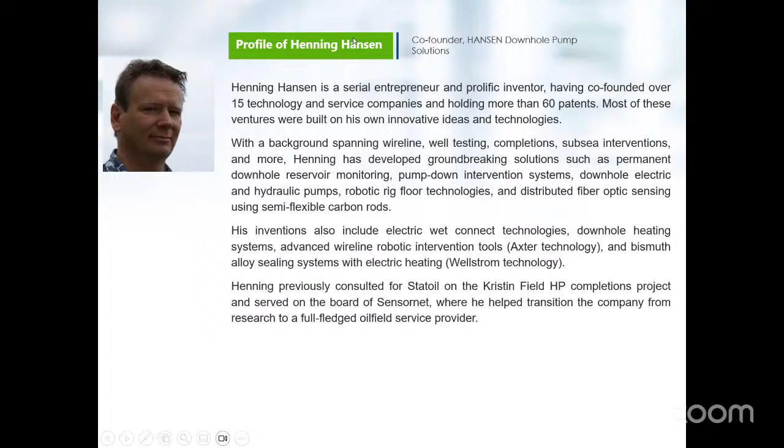Ladies and gentlemen, he will be taking us on innovations in oil field technology, the downhole electric wet connect, and a career of inventive solutions. Please help me welcome the co-founder of Hansen Downhole Pump Solutions, Henning Hansen. The stage is yours for the next 30 minutes.

Thank you. I hope you can hear me now, and I will try to share my presentation here so we can get that started. One second there.

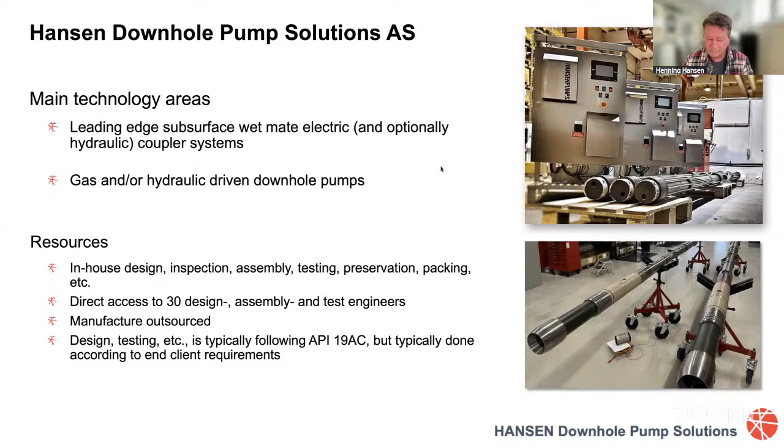Good evening, ladies and gentlemen from SPE Abuja branch, where the existing protocols are duly observed. My name is Nicholas Tuedo of Nequips International. We're based in Port Harcourt. We're into oil and gas services, equipment rentals, downhole tools, maintenance, etc.

Our partner, Hansen, based in Norway, is a specialist in downhole tools with over 30 to 40 years hands-on experience in oil and gas, with several patents to his credit. Recently we got approval from NUPRC for the deployment of the Wet Connect Hansen Coupler technology in the Nigerian oil and gas field. I want to encourage us to pay attention, because as we say, when you're looking for the eye of a fish, you go to the head, and Hansen is one of the best in enhanced downhole tools. We will learn a lot from him.

Thank you, Hansen, you have the floor. There you go, thank you very much Nicholas. As Nicholas said, we have known each other for many, many years, and we're still young. Yeah, so that's good.

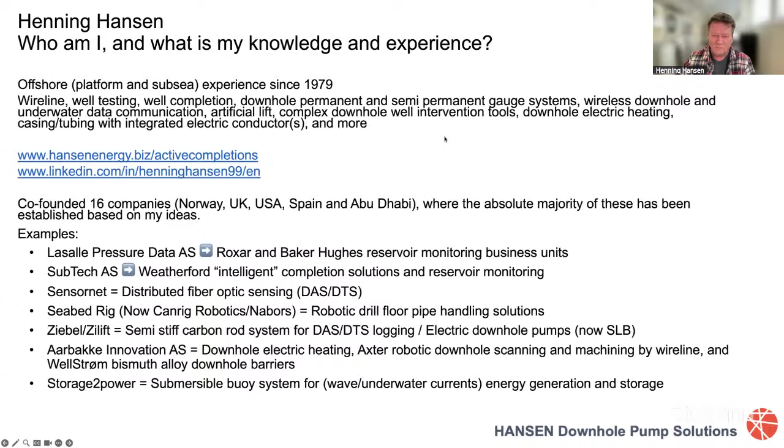But the whole purpose of this connector - I have some slides I'm going to show you after this - is really to get sensors into the reservoir in deep wells or long wells. It's sometimes difficult to run the well completion all the way to the end of the well, to the toe of the well. So then you have to run it in 2 or maybe 3 stages.

You run in the first one, then you have the connector between the first one and the second one, and then you can get the power and data that you need. And as you know, the more sensors you have in a reservoir section down here in the sand face, the better information you can give to the geologists and also the production engineers, and not least the reservoir engineers. They use that data to monitor what's going on in the well, how the well injection is working, and water flooding.

And you produce more every day because you can draw down the pressure closer towards the bubble point, or the gas breakout, and you can also produce more from the reservoir. My experience with having sensors in well bores is that for subsea wells, typically you produce 10-15% more per day using sensors there, because you can balance the production much more.

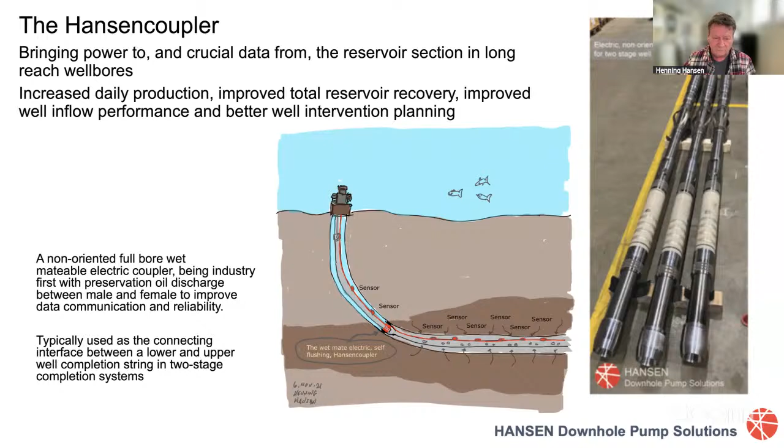So let me see there. Okay, so here I made some sketches to try to illustrate what this is all about, why we developed this electrical connector. For instance, sometimes you have very long horizontal well bores and so on.

And then when you try to run in with the well completion, which is the orange part there, you get to a certain stage but cannot really get all the way to the end of the well bore. So what you need to do is install a lower completion first. That completion will have sensors on it, but we can also have electric valves and other things on it, so you can control and adjust flow or injection on that one. So that's what they call intelligent completions.

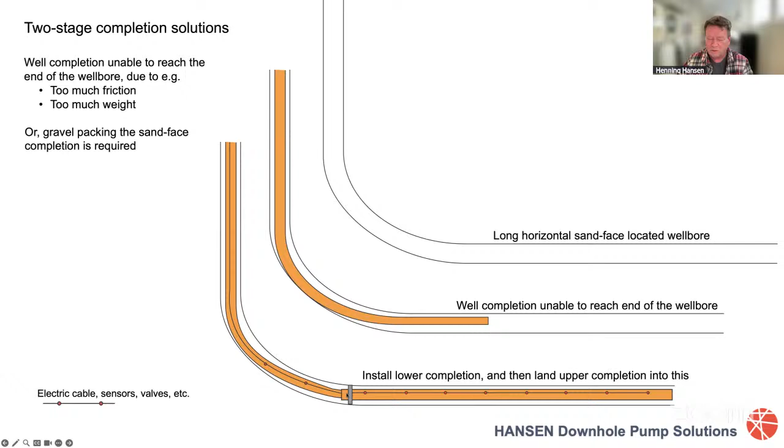And then between the first completion and coming in with the second completion, you need to have an electrical connection here and so on - that is what this is about. You come in with the upper string, which goes up to the wellhead, and you have a cable on it, and you have some sensors if you need that. But then the connector contains the bridge between the upper and lower completion.

So some of the wells we're doing right now actually run 2-stage completions because they are doing gravel pack. They run in with the screens and packers and everything, and have a wash pipe in it, and pump gravel on the outside of the screen. After they've done that, they pull out the running string, the wash pipe and so on, and then come in with the upper completion and connect in here.

And of course, the challenge there is really that gravel packing typically leaves quite a bit of sand and debris in the wellbore. So wellbore cleaning is extremely important in those wells, and we learned that the hard way, that it really needs to be clean.

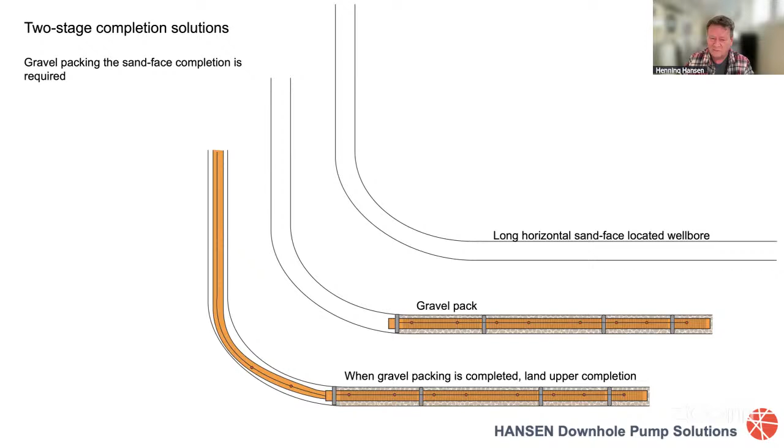So hopefully you can understand that this connector's main use today is actually providing electrical power and signal for equipment further out in the wellbore. Of course, the connector can also implement hydraulic connections if you want hydraulic valves down there, or if you want to do chemical injection or something like that, we can implement that in the connector as well.

So typically what many people forget about electrical wet mate couplers is that if you have trapped seawater, brine, or something in the area where you have the electrical contacts, just imagine if you have a male and a female connector, and if they are connected in that fluid, it's just a matter of time before they will fail. So removing that is extremely critical.

And you typically see the same thing with companies making underwater connectors - they always have some silicone oil or something like that where you connect in. That is much more difficult to do in a wellbore, so that's why we came up with a solution that does that. So if you see somebody has an electrical connector and they do not remove the wellbore fluids, they just isolate it, I am really skeptical about the reliability of that equipment.

So this is quite an old patent now, actually. It was filed in 2011, and I filed it based on how could we replace electrical pumps using wireline. Then we need to have an electric connector. That's how it started, but it also describes how you can use it for the application I'm explaining to you right now.

It also explains that this oil discharge in it is used to wash out or replace the wellbore fluids and so on. But I think the most important thing is that we have built quite a few of these now, done a lot of testing and learning, and there are more patents being produced.

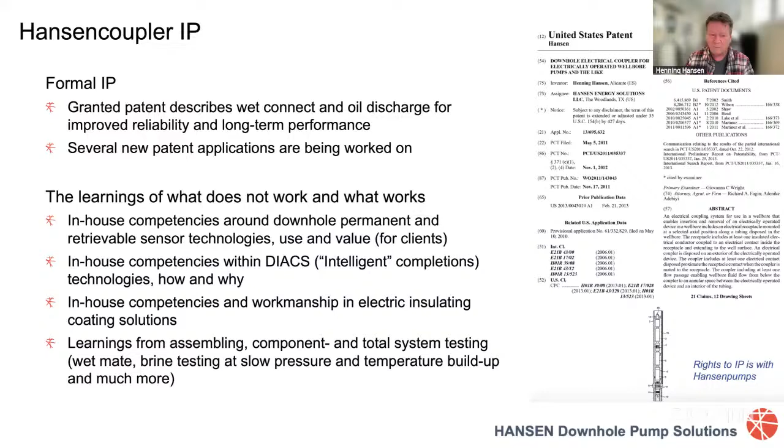I think the learning from that is really what got us where we are right now. So I designed the first electrical wet connector for subsea tubing hangers in 1987. That was the first electrical coupler for subsea tubing hangers and wet trees.

We installed probably 24, I believe it could be 50. I'm not sure because the company was sold later and other people took over. I've also used it in seabed data logging systems.

To the right there you see some photos, that's hydroacoustic data loggers we used on downhole sensors. We installed, and we may still have the world record, 132 sensors in one subsea well, plugged it all off and had acoustic communication from the seabed to the surface. We were the first one to do that, using the same connectors, modified from the downhole use.

I also designed a wet connect for side pocket mandrels. Just like you have side pocket mandrels for gas lift, we developed one with electrical pressure and temperature sensors in them, and we had those sensors wired and replaceable. That's why we needed an electrical connector in there. We learned a lot about downhole connecting from that.

The one we have now, we spent more than 3 years developing and testing it. To be honest, we had some serious failures, and that's what you learn from. You just have to be stubborn and very patient, which I am sometimes. And you have to have a good sense of humor, that's a good spirit for the team working on that.

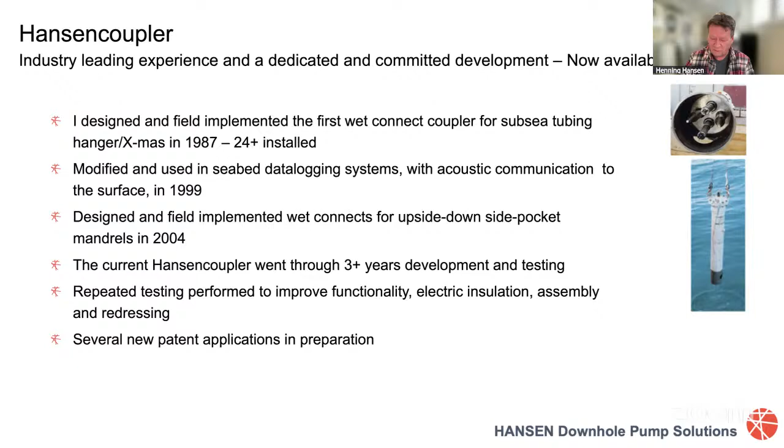And we got it working. We did a lot of repeated testing to make sure everything worked, and we believe today we have a very good product.

Here you see some of the testing. We did oil discharge, a lot of stabbings, pressure testing and temperature testing, electrical insulation and conductivity, shear pin testing, and so on.

Here on the picture, down to the left, you see one of the connectors being tested. This is mechanical testing we did, because the shiny object on the right is the female connector. Above there is a packer, and here you see the upper connector coming in from the upper completion with electrical contacts on them.

Then you have some latching mechanism. We had to test this a lot, because that's what's used when you space out the tubing hanger. First you land the string and say, okay, I have the depth. Then you pull it up again, install the tubing hanger, and do the final landing. To do that space out, you need to know when shear pins shear and when you land, so complex testing had to be done.

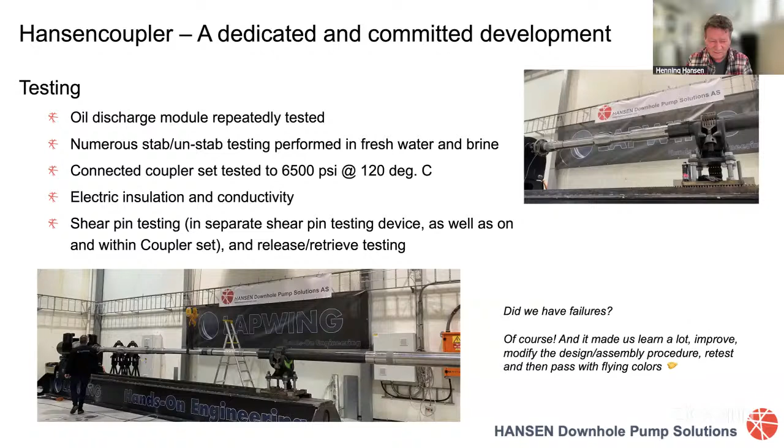And as I said, did we have failures? Of course we did. Then repeated testing and repeated changes, and we got it working. Now we have a product that has no doubt passed with flying colors.

The versions we have are, one for 5.5-inch tubing, installed in 9-5/8-inch casing, that's for one electrical conductor coming from the surface or wellhead down to the sensor. It's a single stab, a single discharge. When you land it, it discharges all the oil, and then it's finally mated.

We have another version, a smaller one, 3.5-inch, for 7-inch liner. That's a little more complex because it has 2 electrical cables, but we can go up to many more electrical conductors if we need to. We have the design for that one, including the hydraulics.

We completed the testing in 2024 on that one, and the testing was very comprehensive. On the drawing at the bottom, you see the female unit, connected to the string below. Up here you see some ratchet mechanism, that's how we can latch in a running tool and rotate the lower string if needed. And here you see the upper connector, there's a stinger that lands in and latches, with a latching mechanism.

Then you latch in, and you can pull out again and do the space out of the tubing. And then you have electrical contacts around that one for the cables. And these contacts and so on are very rugged.

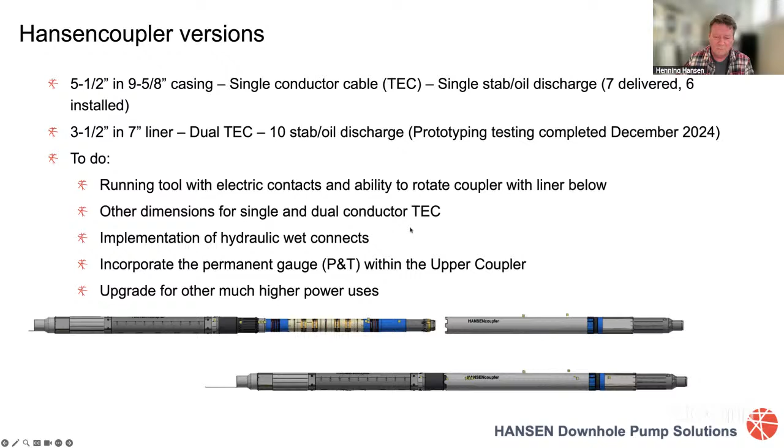So the first one we did, actually we've installed 6 of them, and they're all in deep water wells. We had one failure, and that was a mechanical failure, because as I told you, it's doing gravel pack, so there's a lot of debris there.

We had problems cleaning out the well, so we had mechanical damage when landing it, which is something we learned, and now they have much better cleanup operations in the wellbore there. So that's good. There's going to be quite a few more of those installed.

On the photo, you can see that version there. There's a stinger here that lands into the lower connector, the female. When it lands, this stinger is pushed in, and that displaces oil in this section here between all the seals, and this is where the electrical connector is.

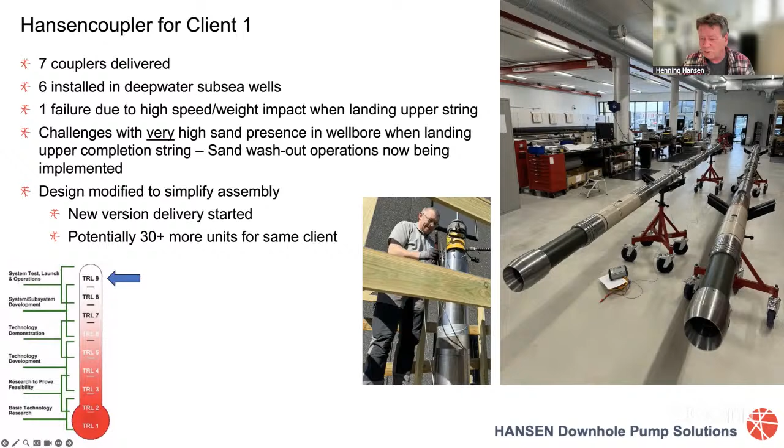So the oil will be displaced between here and the female connector. All up here is just a centralizer to make sure that we don't damage it going in the wellbore, and all the latching equipment is onto it.

The other one we designed for one of the large intelligent completion companies. We completed that one, and that can do a lot more connections. We have the displacement of oil.

We can do 10 times on that one. So that makes it a product which is easier to do when you have problems, for instance, spacing out the tubing hanger and so on.

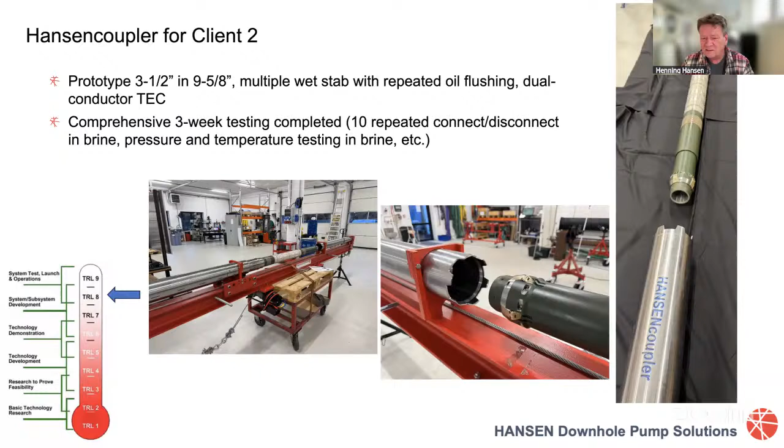So here you see it's on a test bench. We did a lot of repeated stab-ins and testing on the test bench to see that everything works, and measure the oil discharge from it and so on. I think next page here shows some of the testing we did, and it's a pretty good explanation of how the tool works and looks like.

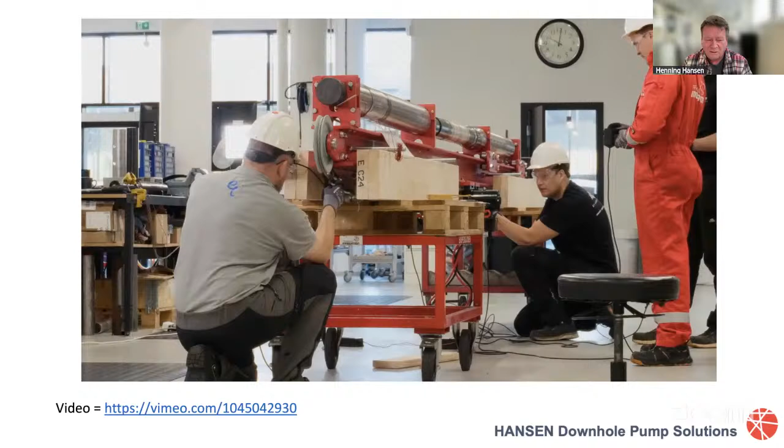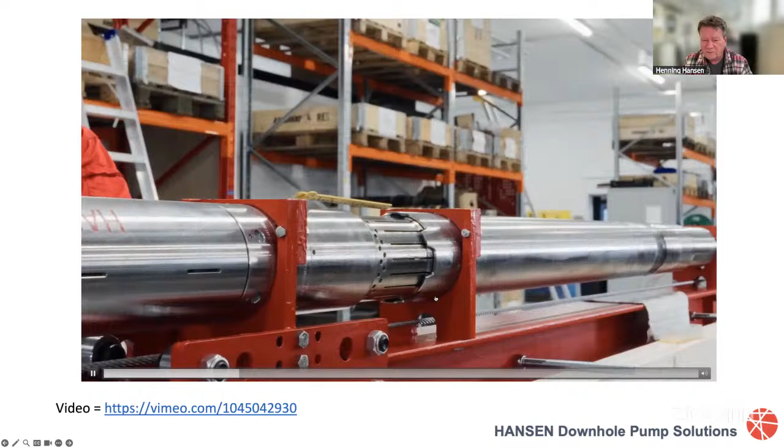So here you see the electrical connectors and the people who are testing them. Here you can see we're entering the female with the male connector and doing all the measurements we need to do there.

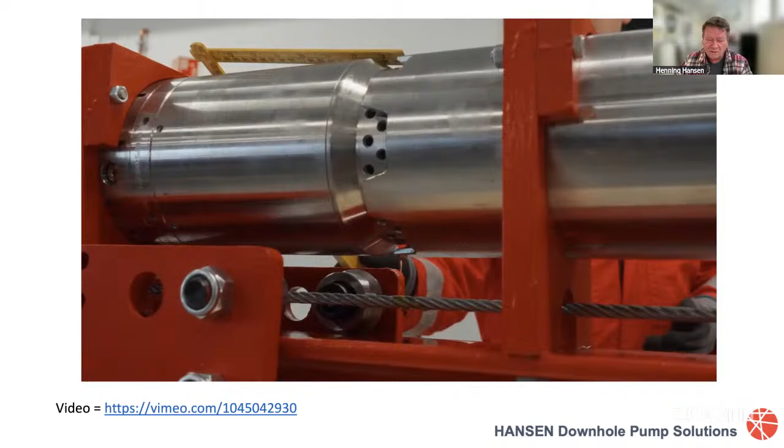So we did repeat the testing, a lot of testing on that one to make sure that everything works. Here you see seals, and you can see it's all connected. And here you can see oil coming out, some of the oil dripping out there.

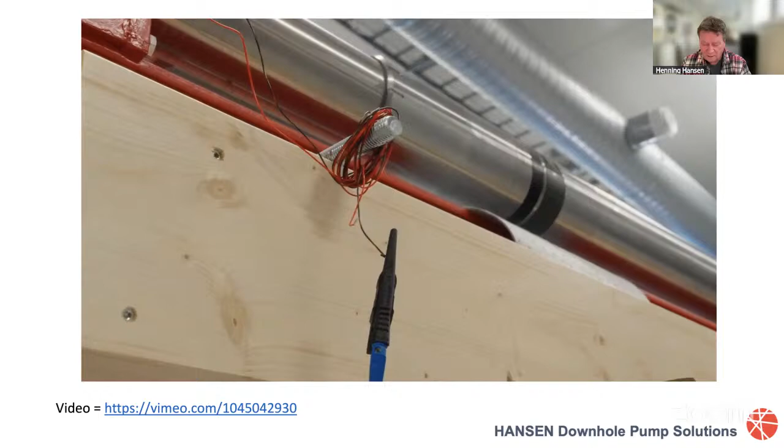So there's two locations oil comes out, but you still have an overpressure on the oil in the connector. So it's a very good testing. It showed that all the oil volume we needed is what's discharged, and it works.

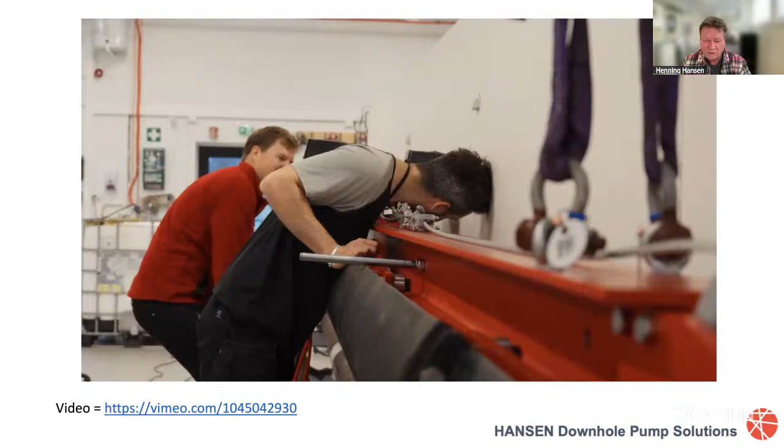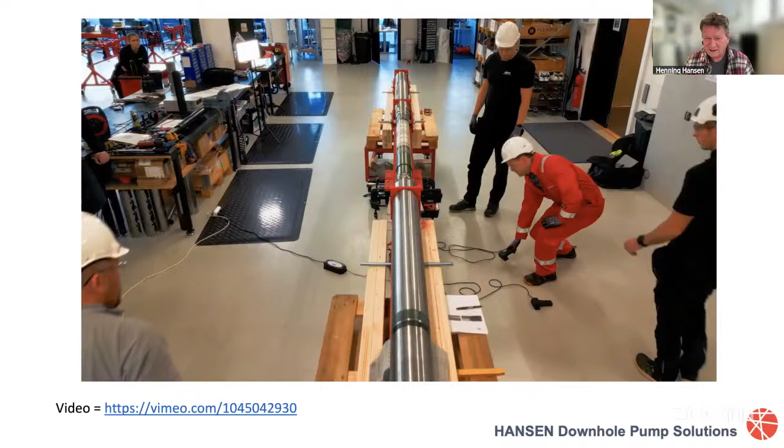So here you see these are the people designing it, that you see on the video here. I believe the people designing it should not just sit at computers designing. They also need to go down and participate in assembling and testing. My experience also, they love that. They have a much better feeling about what they've designed and can also follow up on that one.

I'm not sure how much time we have, but I can quickly go through these, because there are always some safety issues when you handle this equipment, mainly because it's heavy equipment. For instance, these components are 400 to 700 kilos, so lifting and so on, it's important to have proper safety around that.

Pressure testing also, I've seen some bad accidents many years ago with pressure testing. So it's important that you use certified equipment and that everybody knows what they're doing. It's also important that people know the dangers of pressure testing, because 5,000 psi or 10,000 psi is a lot of energy.

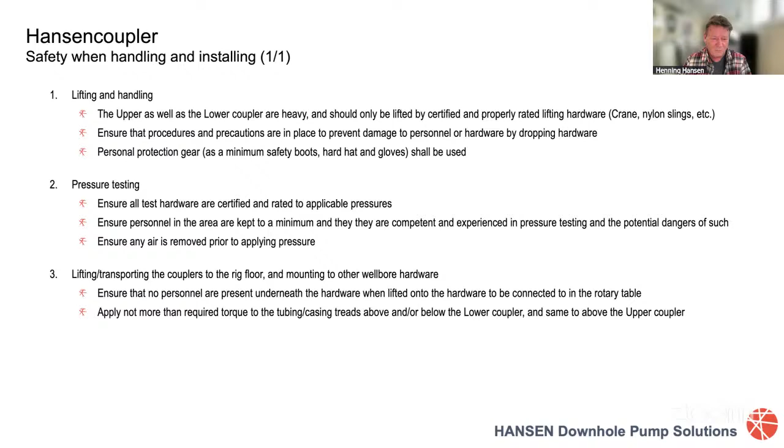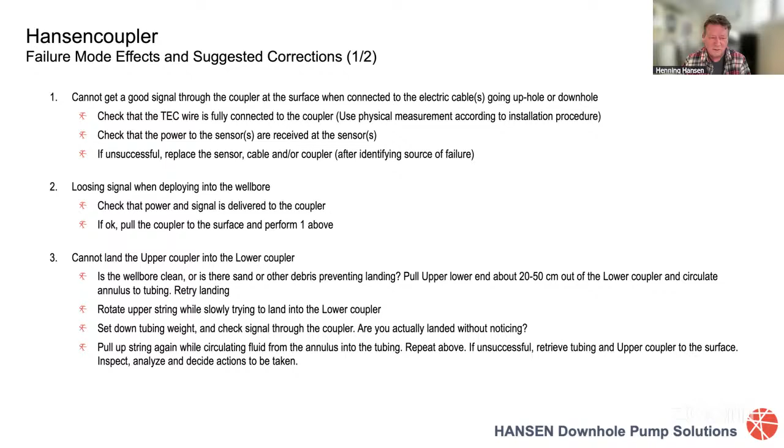So we have procedures for that, also for the lifting from the rig floor and so on, and all this is shared with the people there. We also have, for instance, what if you don't get a signal? What should you do then before you panic? Typically that's at surface, a loose connection at surface on the reel from the cable. You quickly find out with these procedures, but there are procedures for how to manage that.

So a lot of this will be shared with you. Now these are some new ideas I'm going to show you that we're working on.

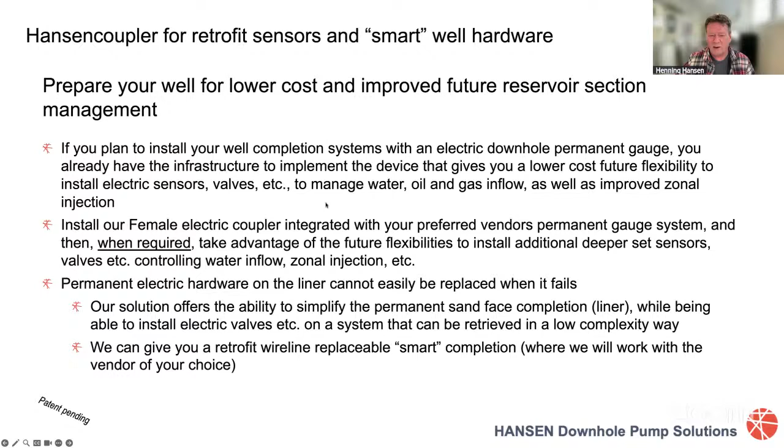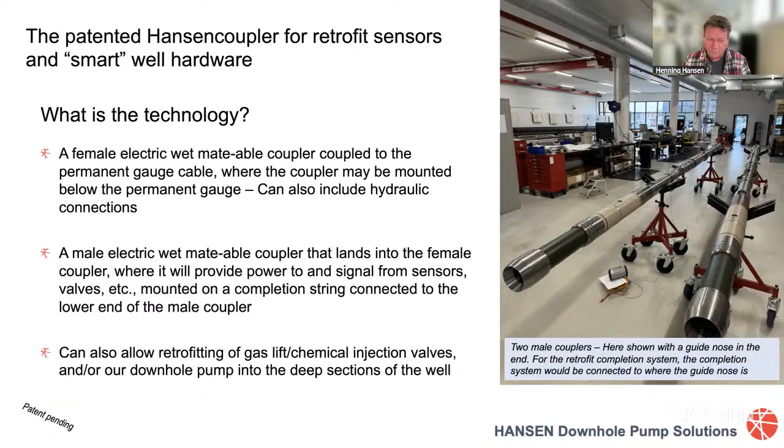Can you prepare a wellbore for future, more complex use? Because quite often you install a well completion, and then after 5 or 7 years, or maybe shorter, you see that you should have had more sensors, or more valves to control the wellbore, the inflow or the injection. So based on this technology, if it's an electrical or hydraulic connection in the wellbore, with creativity you can think of many uses for this. I'm going to show you a bit of that.

Here's one example: you have a well completion with sensors downhole, and you install a female connector in here. This connector has a protection sleeve in it, so it doesn't do anything as long as you don't need it. But then, if you need to do something, you can pull out that protection sleeve, and you have an electrical contact available for installing something in the wellbore.

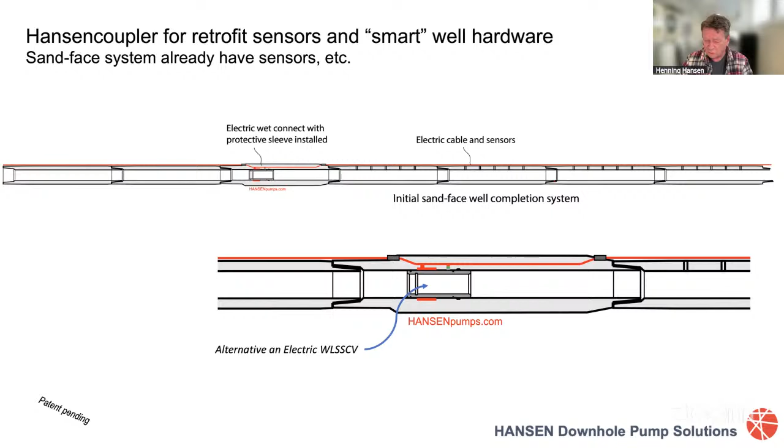So here, the same sketch up here, we've removed this protection sleeve and installed an electrical connector, and we have a completion system installed in the wellbore. That could be, for instance, that you need to block off some inflow or injection areas, or you want more sensors in the wellbore. That's fully possible with this.

Also, what we implement in this is that if you have a failure on the cable or the sensors further downhole, we can isolate that. We can disconnect this cable and route the signal into the cable going into the insert string. So suddenly you get your sensors back - new sensors, but you get all the monitoring back, and you can do what you need to do there.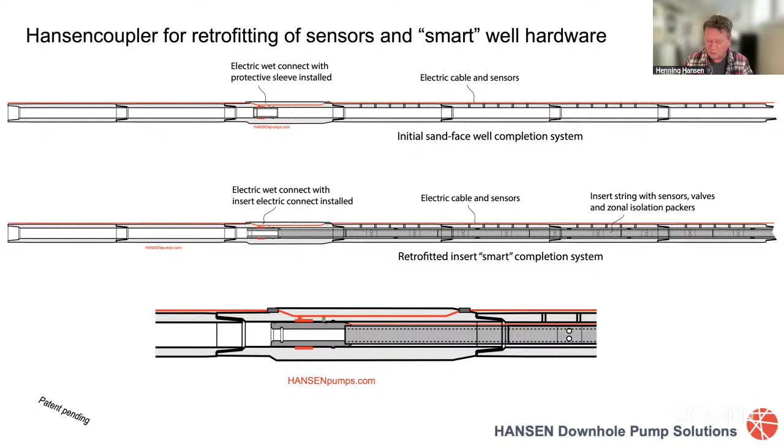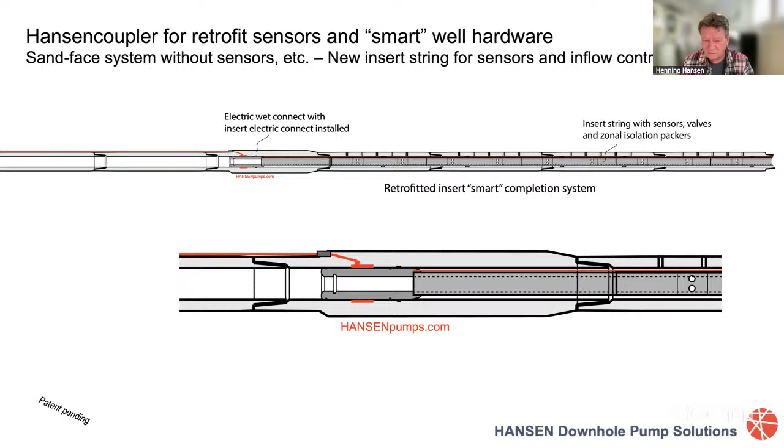So here you see it's more or less the same thing. You can also have a system where you don't have sensors initially, but you have an electrical connector in here, and you may have sensors further up. Then later, after some years, or maybe 6 months, you find out you need to run some sensors in because you really need to understand what's happening in your wellbore. Then we run in with this string with all the sensors, and you maintain the injection or production while getting the data or control you need.

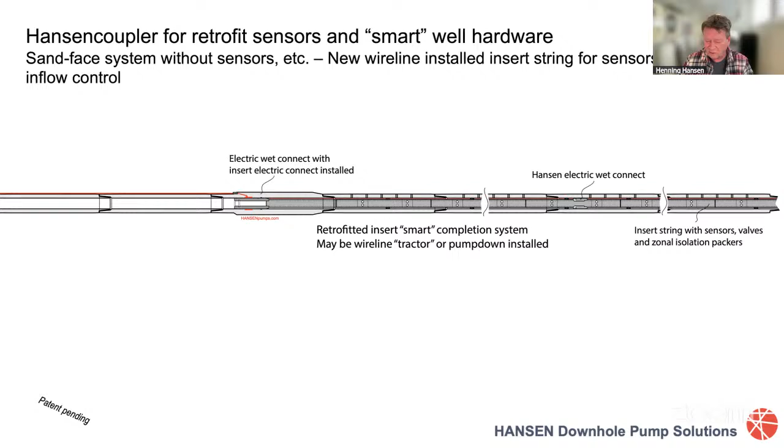What I also believe is possible, many times offshore or subsea, doing a recompletion or running a long string can be a challenge, very costly, and you may not have a stiff riser long enough. So I'm working on how we can install those with wireline instead. Can we install an intelligent completion with wireline? Here you see how that can be done.

You have shorter assemblies, which is the length of the lubricating system you have, including whatever riser you have and so on. And you have electrical connections between each assembly. So then you run in one by one until you land in the old connector in the tubing string and so on. So certainly you can have an intelligent completion retrofitted by wireline later on.

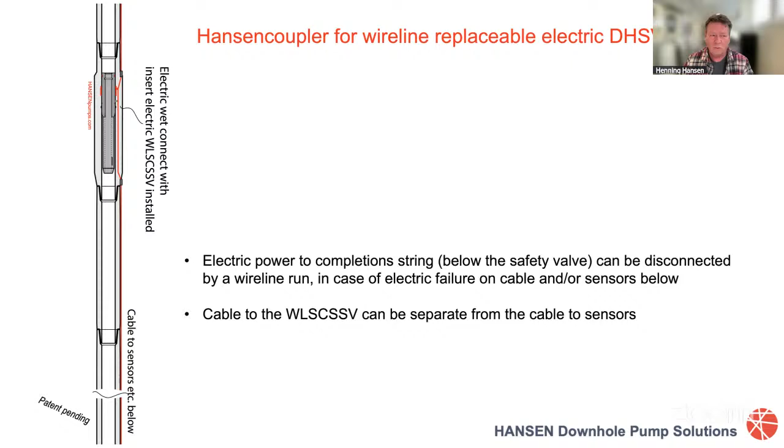Here's another one I'm also doing, and that is electrical safety valves are coming out. There's also some already on the market, but there's more coming out. This can be used for providing electrical signal to a wireline electrical safety valve. It could be on the same cable as the sensors, or it could be a separate cable. And we can also have this disconnect function for sensors or whatever below there if you want to just have priority on the safety valve.

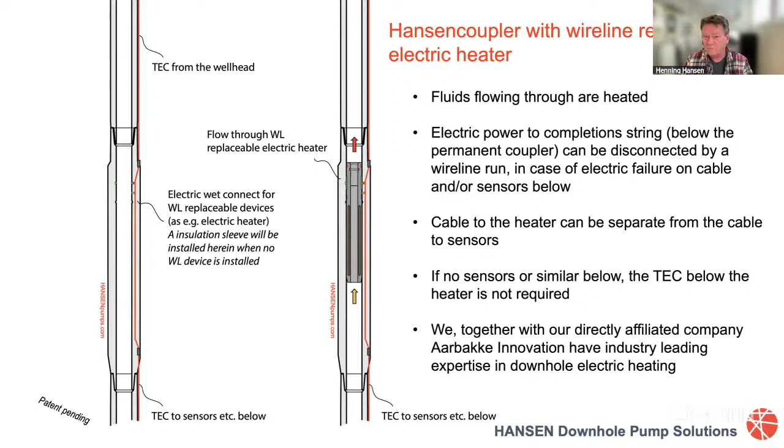But also, as I said, I'm involved in electric heating systems and so on. That will require much more power than we can do now, but that is what we're working on right now. You can have an electrical connector in here, and you can land an electrical heater in there, which heats the production flow, avoiding paraffin or things like that. Sometimes you can also see the wells flow much better if you heat the fluids and so on.

And here's the latest one. I'm sorry about the sketch, but it's actually how I normally start. I start with hand sketches to explain what it is, but this is how we can use this for electrical pump and so on.

My idea there, the plan was actually, we will have a standard ESP system, the motor and everything. And then we have a no-go or latching mechanism implemented. Here you have a traveling piston, with the upper part will land under that one. It displaces oil in this action when we land it. Here we have the electrical connections and seals and so on, and then we have the pump intake, and then standard pump above here and standard ESP below there.

So it's not really rocket science. It's just a matter of a solution where we can do anybody's electrical pump. If it's electrical, we can implement this one. Where they normally connect their cable, we can connect our system.

So the way it would be in the wellbore, we would have this sub here, which has the electrical female connector in it. There's bypass tubes here, where all the flow is going past the motor. You have all the cooling you need. It comes up here, passes the electric connector, and goes into the intake for the pump. And then it's brought to the surface.

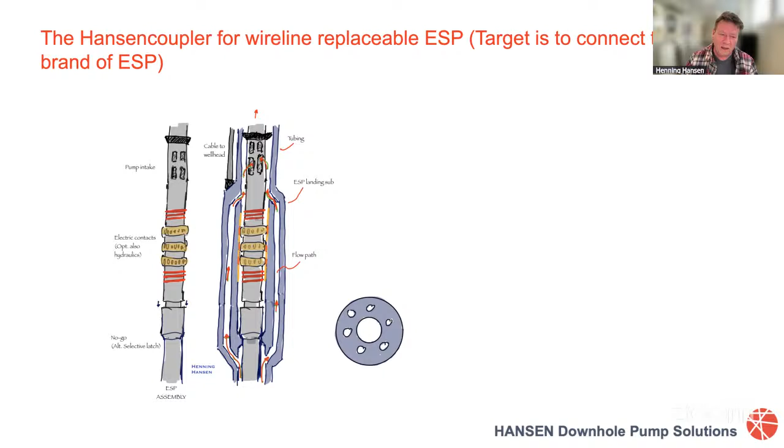So here you can install a pump by wireline, and you can retrieve it when it fails, because typical pumps do fail after some time. And you may have several of these to get more production and so on.

You can also say, well, I'm going to have a tubing deployed ESP, but I'm going to have a coupler, electrical coupler up here. Because if the tubing deployed ESP fails, it's too expensive to replace the well completions. So I'm just going to run in with a wire and deploy the ESP. And that is possible. We can do that with this technology.

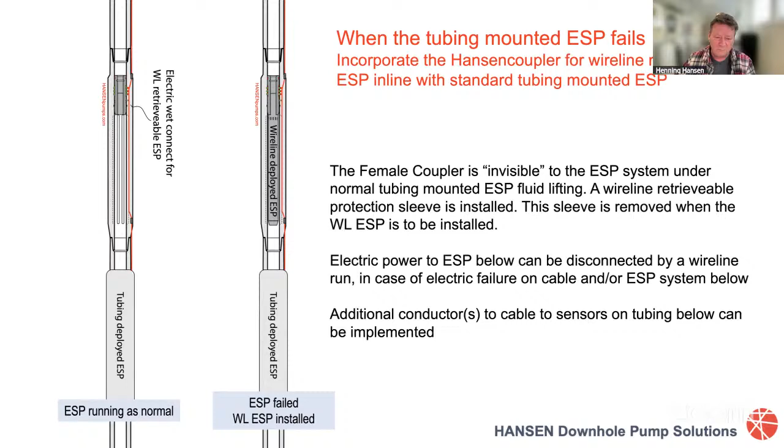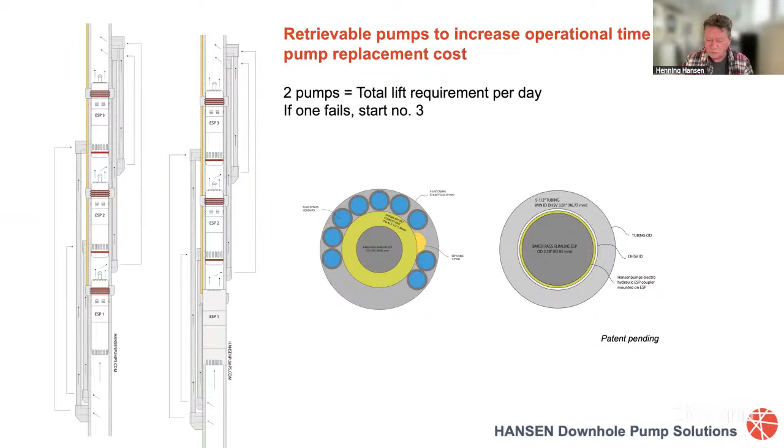So this is the last slide I have. I hope it was not too boring, but as I say, I'm involved in downhole electric heating and so on, also in placing bismuth or melting metals in the wellbore. Also, I'm doing a project where we remove the cable outside tubing and have electrical connections in the tubing. So when you run a tubing string where you have sensors and tele-completions, you don't need any cable clamps or cable protectors or any cable on the outside.

And you can really remove the number of people on the rig floor doing this one, and much safer operation. And also the offshore energy generation, storage and delivery is also something I'm working on, and also this complex wireline technology.

I hope I can present that one day, because that's quite an interesting, fascinating technology. Many people agree with me that in wireline we have had 3 revolutions, or really evolutions. That was when somebody invented wireline many years ago. Then some years ago, somebody came up with a wellbore tractor, which made much more possible in the wellbore. And then we came up with this Axtor robotic technology, which can do machining and scanning and all kinds of things in the wellbore and robotic operation.

So suddenly there are so many things you can do with wireline that you normally would need coiled tubing or pulling the completion for, and so on.